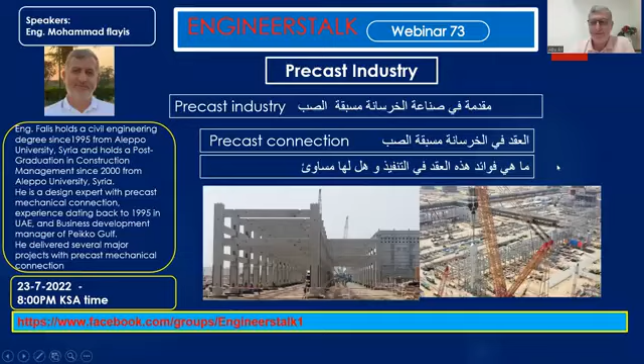I will speak today about precast and the advantages of precast, then some case studies or projects done by precast, and how I will connect the precast elements.

This is the agenda of today's talk. I will start with an introduction on precast, because all of us have heard about precast, but I'm going to show some photos inside the factory, from the site, from the stockyard, from all the process of this precast. Then I will speak about the challenges in the precast industry.

This is some photos from one precast factory. This precast factory is covered by shade. Here we will see this table, which is made for casting a precast element. This table can be tilted and rotated for some purposes, to remove the precast element.

Here we have this precast factory with many tables. We have many methods to cast the precast. One method is on the table, another method is to cast on the bed. We will see some photos for that, but the most famous way is to use this table and prepare the mold on it to make the concrete.

Here, this table has the formwork. This formwork can be normal width or wooden, or it could be steel. It will be as required, but it is more common to use this steel mold.

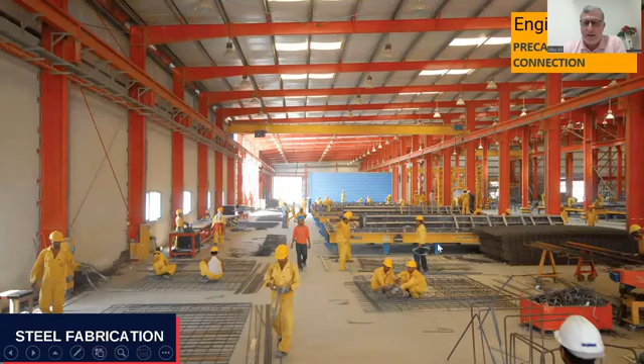Then we will have this area to prepare the reinforcement. As we said, this reinforced concrete material requires reinforcement. As I said, here there is light and there is shade. We can work 24 hours, no obstacle for that.

Here, as I said, we also have this chamber to take care of curing the concrete. After we cast the concrete on the table, we can take the table inside this chamber, and we can implement

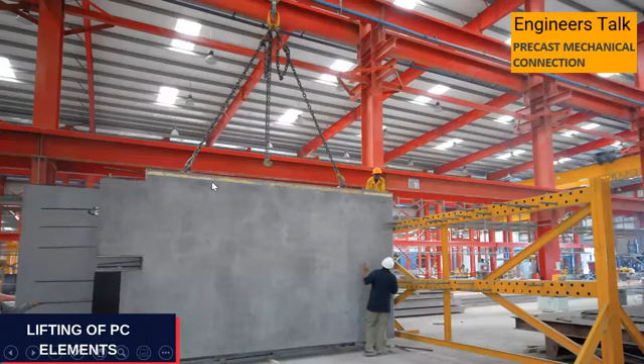the required curing for the concrete to reach the required strength and to accelerate reaching that strength. After we cast and take curing of this precast element, we can handle it to put it in the stock. There is lifting, and we can use the precast element to locate it in the stock yard.

What I speak about is a precast element - we have many types. What we said, that element is a precast element used for wall. We have another type of precast element for hollow core. This hollow core is needed for the roof. It's a normal precast, but there is a core inside the element here to minimize the weight.

And normally this element will be pre-stressed. There is a bed, we will make this strand, we will pull the strand. Then there is a machine to cast the concrete. The type of concrete for this hollow core needs no shutter, because it's named zero slump. No need for any mold - the machine runs, and behind it, it creates the hollow core.

This hollow core is too famous, cheap, and required in the market. It's too much needed on site, and it can go for more span because it's a pre-stress element, and it's light because of this core.

Above this hollow core, on site when we erect it since it's used for the roof, it requires some screed above the hollow core. For this reason, there is some rough surface above the hollow core.

Also, there is another type of precast element for the bridge, this girder. This pre-stressed element requires another type of bed. They will pull the strand and cast it as per the shape. It will be T or I section as per the design.

In conclusion, here I will come back. As we said, the precast is like normal concrete, but a different way to handle it.

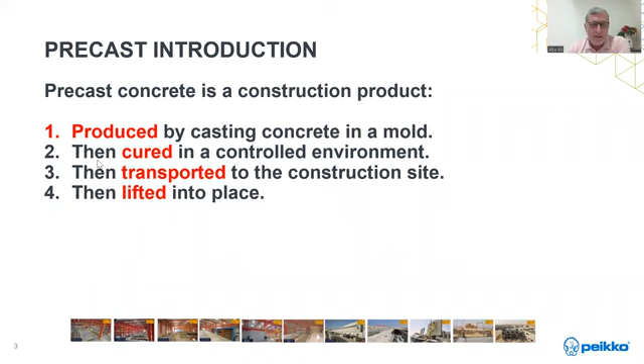I'm repeating because some people entered recently. Here we will have this for precast. Inside the factory, we'll have a table to make the mold and to cast. We will do the mold above the table, and we will prepare the reinforcement inside the factory, which allows us to work 24 hours, 3 shifts or 2 shifts.

Then after we cast the concrete, we can get the table with the concrete to the curing, where we take care of the concrete to reach strength in a fast way. After we make the curing and reach the required strength, we can get this element to the stockyard.

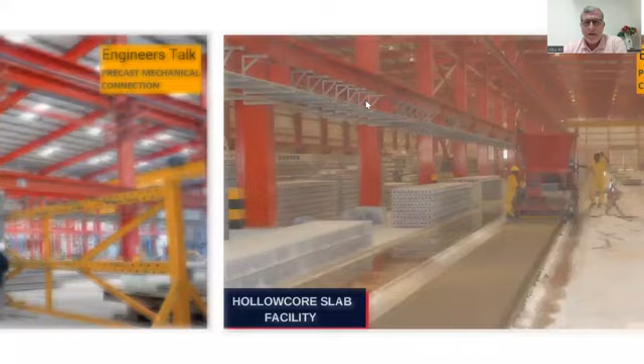As I said, there are different types of precast elements. That's what we spoke about for wall. We have another type of precast element named hollow core. This hollow core has a core to minimize the weight of the element. This uses zero slump concrete, no need for mold, and there is a strand for this.

There is another type of precast element named girders, used in bridges or big spans. Normally like this, what we see here, more than 30 meters - it can be designed as I section or T section or whatever required for the design, as per the mold and design. This is a pre-stressed element, sure.

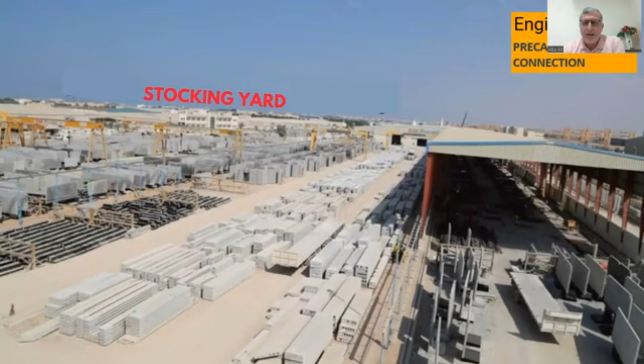The advantage of precast is that we can start the superstructure of the building along with the substructure. On site, they will start excavation and prepare the foundation. At the same time, we can do the superstructure to cast the column, beam, wall, etc. For this reason, we need a big stockyard for precast to put the elements ready for when the foundation is ready to take them.

In precast, we require a strong planning engineer to manage, because if there is a mistake in planning, that means no use for precast, since we use precast to get the building done fast. If there's a mistake in planning, I will finish the foundation and that column is not cast, we cast some other element, then it becomes a problem. For this reason, we require a strong planning engineer and a strong stockyard to cast all the elements. When the site is ready, we can take the required element to the site.

Here, after we cast the element and see it's required in the stockyard, we handle this and take it through a trailer to the site. Here it will be delivered to the site, then it will erect the element. This here we erect the hollow core.

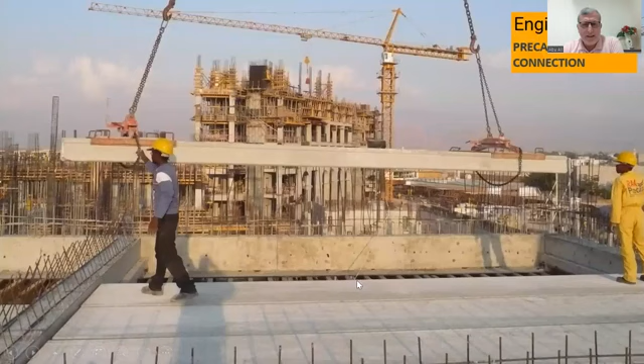Now we see in this building we are using only hollow core as precast. The other elements are cast in situ. It's normal - we always try to get the maximum optimum solution. Sometimes we go for partial cast in situ, other parts precast, other parts steel. It will be the optimum solution.

Also here, another project, but here we are using full precast - the column, wall, even the roof. All this precast, erected in precast.

Let me give you an idea about this project. This project in Dubai was 2,100 villas. The agreement for the precaster was to produce or erect 6 villas per day. Imagine finishing 6 villas per day. This unit here is actually 2 villas, required per day, finishing 6.

Imagine if we go for 36 villas - one day he will finish all walls for these 36 villas, next day he will finish all hollow core. Within 6 days all 36 villas must be finished. If we divide it, that means per day you finish 6 villas. This is the advantage of precast - we can finish the structure very, very soon.

And there's another advantage for precast - you get a high level of quality. No need for plaster, you come for paint directly. Then we can conclude this precast advantage - surely it will expedite the construction.

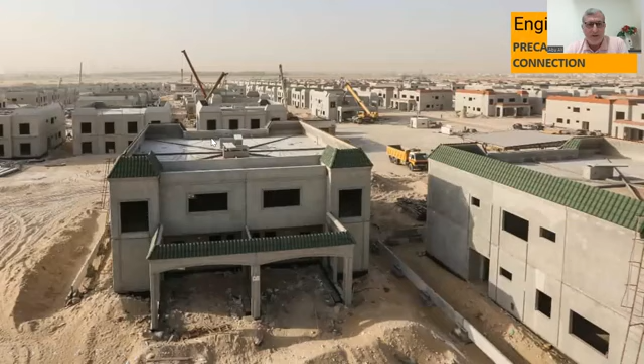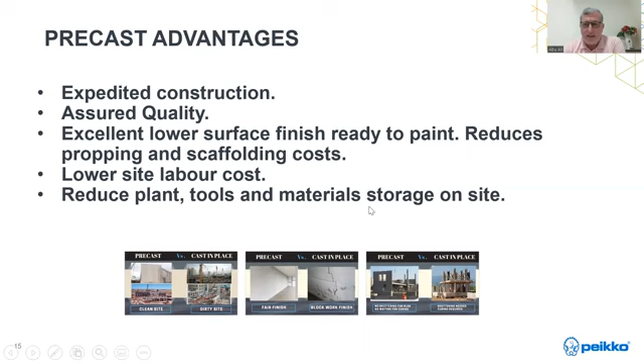So I will have this on the site - I will have less stock material, less operation on the site. Here, if I compare between cast in situ and precast...

As I said, it will be a clean site because there's no formwork, no waste material. It's ready from the factory only to erect - you will see a very clean site. Surely for cast in situ, all the activity will be done on site, so it will have a lot of waste material.

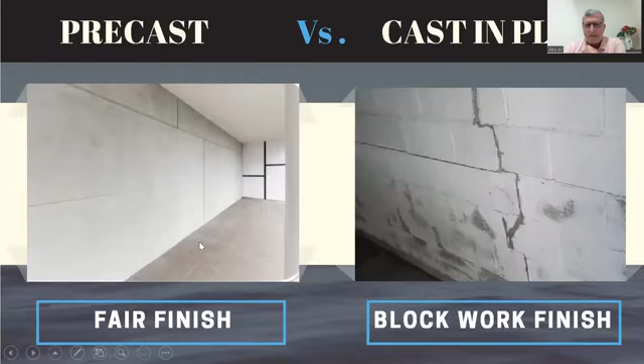Also for precast, because it's reinforced concrete, you will not find any cracks. For cast in situ, unfortunately, because of small element block work and some differential settlement in the foundation, it will create cracks. As we said, there's no formwork for precast, while cast in situ requires many formworks, many shutters, which requires more time.

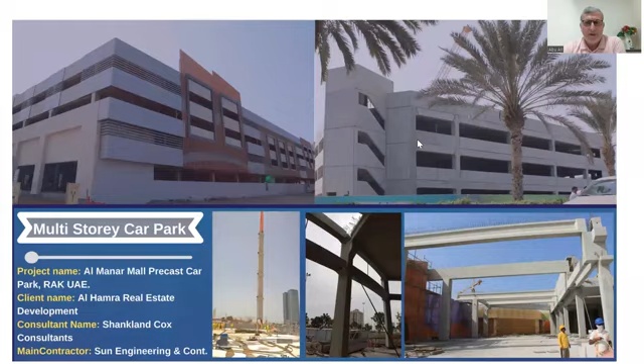Here now I'm going to show some projects done by precast, to give idea about precast, because as mentioned from Engineer Abdul Hakim at the beginning, it's now become a famous industry. All people are thinking about precast. Yes, now I will show some projects done by precast.

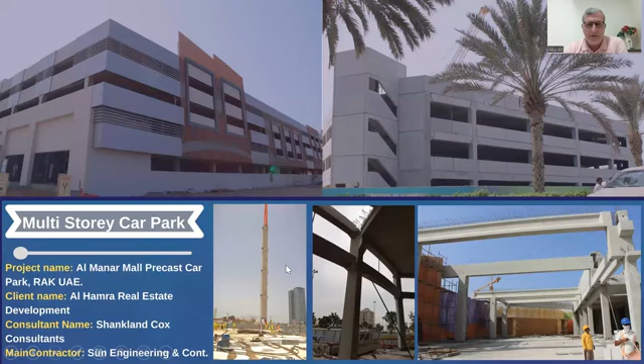Here one car park in Ras Al Khaimah. This car park, sometimes it will be precast to have typical elements. Sometimes the typicality will be inside the building itself. Suppose I have this element, I will see it repeated many times inside the building, then this building will be useful for precast. Not mean I need many buildings to go for precast, no, I need typical elements. Here in a car park, if I look for this column, maybe I'll see this column 100 times. Then it will be nice - I will go for a mold, prepare it, and do it in precast.

Then for the school it will be also the same, because there is typicality, there is classroom repeated, and this element has repetition. So the school will be also useful to be precast. And for the school there is a specific requirement - a school delay lets the client lose, he needs the school to open, and if the contractor delays construction, he will lose one year of investment in the school. For this reason, most of them use precast to accelerate and start investing in the school sooner.

Also here, one industry for oil and gas, where there are pipe racks. These pipe racks in oil and gas will be column and beam, and there is a pipe of oil that runs above this beam. Before, it was not famous to go for precast, but now most of these pipe racks become precast. I will go into more details later in this meeting about these pipe racks. All this column and beam, typical, can be designed one time with one mold, then you can repeat the casting and get the structure very soon.

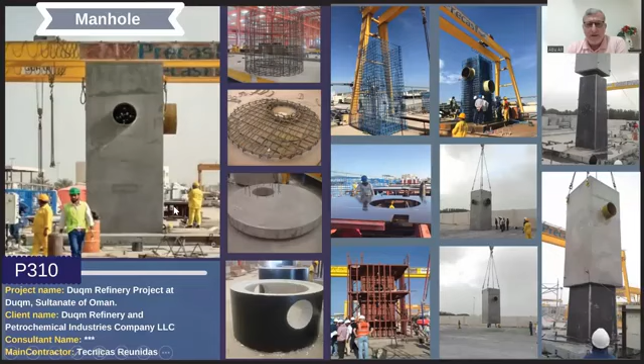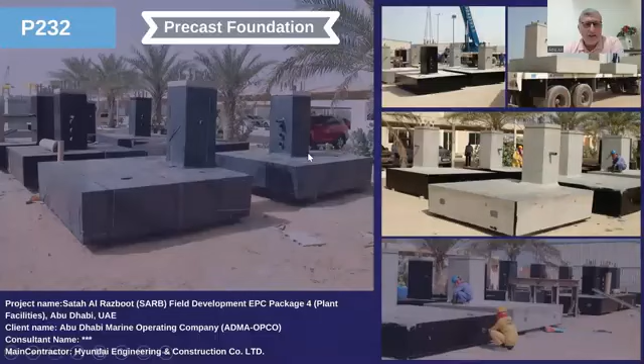Also for foundation - imagine this foundation, normally it's preferred to be cast in situ because it's a heavy element, and to handle this element it will need more money and cost. But sometimes for far areas, like this island in Abu Dhabi for oil and gas, not able to reach for cast in situ and not able to get people to work there. For this reason, they get it in precast - they get it ready in a precast factory and erect it on the final stage. But in normal practice, foundation is preferred always to be cast in situ due to cost, because this heavy element, imagine 3 meters, 4 meters, it will be many tons. To handle this will be so costly, but required.

Another type of project - this accommodation, where we have staff or labor accommodation. There is typicality of many typical elements inside the building, or sometimes the whole building is typical, repeated. We have this staff accommodation repeated 8 times or 5 times or whatever. This would be a very good solution for precast. Where there is more typicality, sometimes precast will reach the same cost as cast in situ, because the mold is prepared one time, then it repeats. For villas, here for villas, I believe now when we have bulk villas, they will think only of precast.

As mentioned, this project requires 6 villas per day to be ready, imagine this magic number, you cannot reach it easily. Also for this infrastructure or road, where we have a bridge above the water, how can I work? If I go for cast in situ, it will be too costly and maybe impossible. For this reason, precast will be the good solution, especially since there is a big span reaching 40 meters, and it's easy to cast.

In this case, sometimes you can move the precast factory near the site. If you have a typical element, you can make the mold, get the crane, and get skilled people near the site to avoid transportation. Because if you have a heavy element or a big number of elements, it's better to cast it near the site and erect it directly to avoid transportation cost. But sometimes if the logistics are far, you need to do it in a factory and transport it to the site, case by case.

It will be studied very carefully because when there is money involved, it will be studied very carefully. Now here's the challenge of precast. Until now we see precast is a very good industry, but there is a challenge because we are going to cast the elements separately - column, beam, wall - and get them to the site.

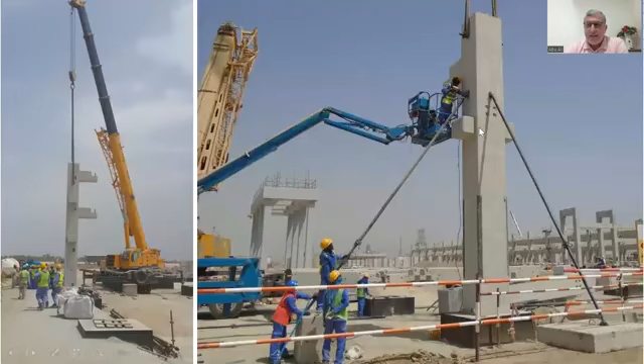Here are some site photos of how I see this column, how I have this propping. They will fix this propping with the precast element, connect it with this counterweight, and here it will be - there is the grouting, and this is the crane.

Here's some site photos, and here there is also one challenge. I need to keep the crane until I fix all this propping. This will cost me more to wait and to grout and to make this propping.

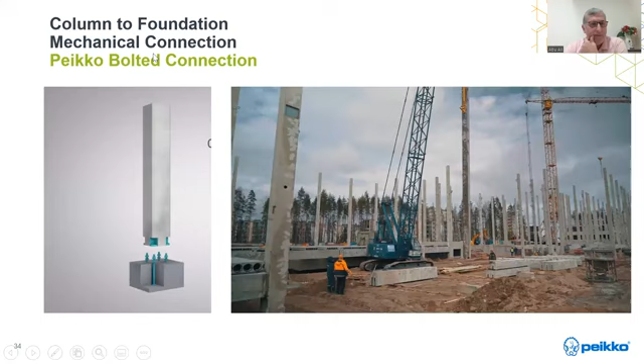Now I will speak about another way, which is mechanical connection. With this mechanical connection, I can connect the precast column with the cast-in-situ foundation easily. No need for the bucket. I will make only dowels from the cast-in-situ foundation, and I will get these dowels here.

I will insert the dowels during casting, and I will place a steel element inside the precast, what we call here the column shoe. This will be produced by Peikko, this bolted connection.

I will insert this in the precast element and provide the dowels. Then it becomes direct to erect. No need for the bucket and no need for temporary support. No need for anything—it will be erected like you are erecting a steel structure.

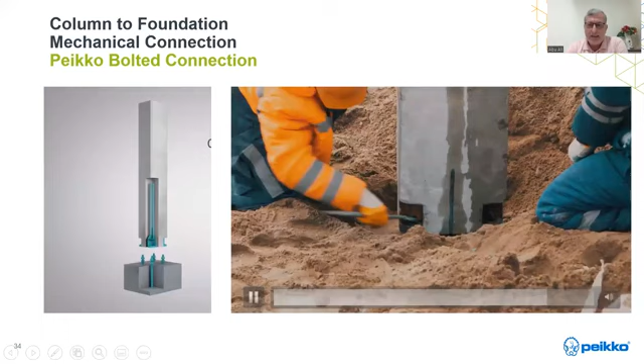You will get this element, put it above the dowels, put on the nut, and done. It's even easy to do the leveling and alignment because it's not final fixed yet.

The advantage of this mechanical connection, as I said, is that it's quick and easy to erect. No need for the headache of the crane staying for propping and grouting. All these things are not required in this connection.

Also no need for temporary support, as I said, and less crane time, because as soon as you tighten the nut, the crane can move to the next column. No need for cast-in-situ work between the bucket and the precast column.

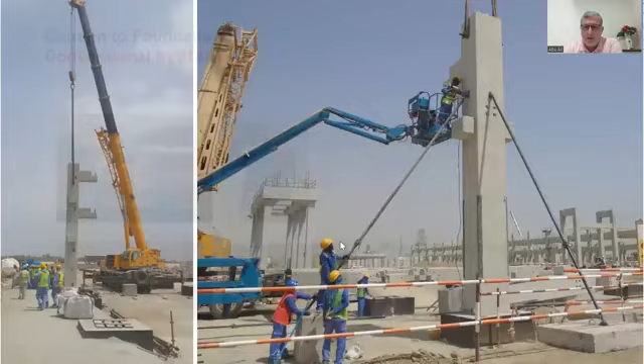This allows for a shallow foundation. As I said, when I go for the bucket method, I need more depth to provide fixation between the column and foundation—I need to go for 1.5 times the diameter of the column. For this reason I need a deeper foundation.

Maybe for this bolted connection, no need, because I only need to catch the anchor bolt. The foundation depth will be as per the soil report and the study, but in all cases, compared with the normal method, here I can use a shallow foundation.

This makes design easier, because we have free tools on the Peikko website. It can give the forces coming from the column, and we can know what shoe is required.

Now it comes to mind: where I will use these dowels, I will have the challenge of erecting the precast column with this dowel. This is sure to be a headache, but we solved it.

We provide a template during the cast-in-situ work to maintain the dowels in the same place, and in the precast yard there is also a template. Then the hole will be aligned with the same place as the anchor bolt. No issue—we have done a lot of projects, alhamdulillah, with no issues. It's simple and just needs care in using the template.

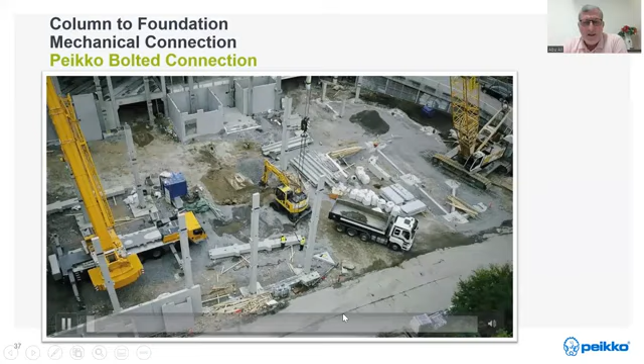So here showing how this column is connected. It's easy to align, and here is the column at the main floor.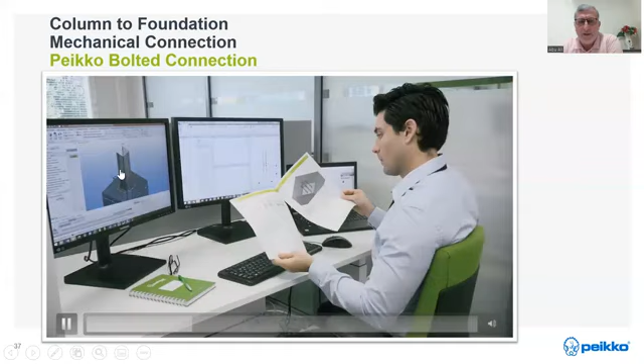Now in the precast yard, how do we make this template? Let me show this—here's the side view of how it works. Now this shows a 3-floor column.

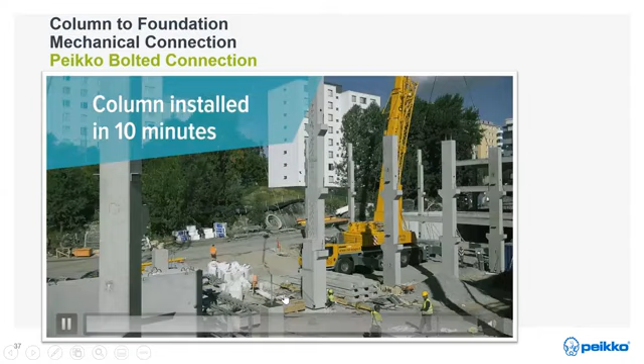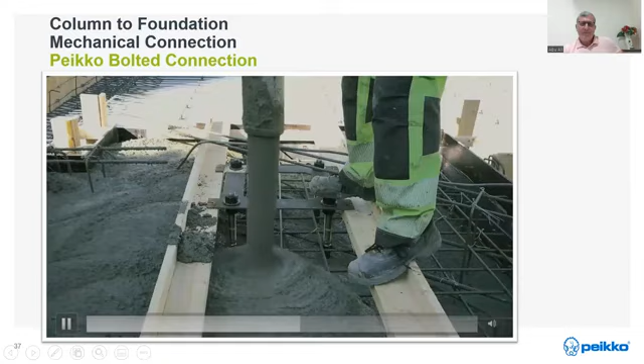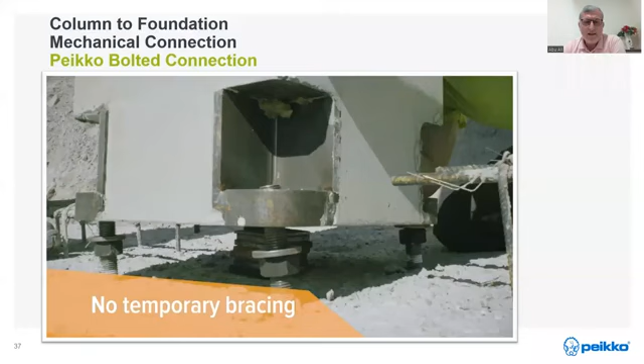We're speaking about connecting the column with the foundation, but the same concept applies for beam-to-column connections or others. As I said, no temporary bracing required, and now with the vertical element, no bracing at all. The site stays free.

Just a crane operator and 2 guys.

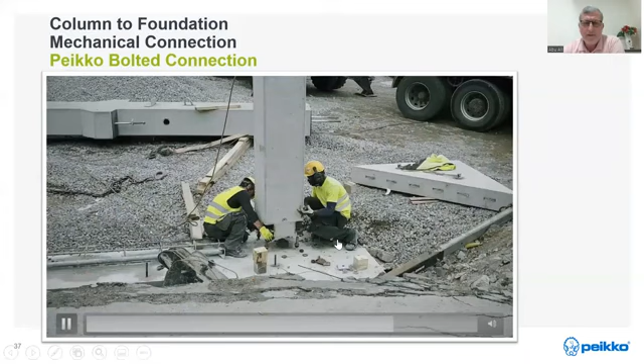All this information can be gotten from the website.

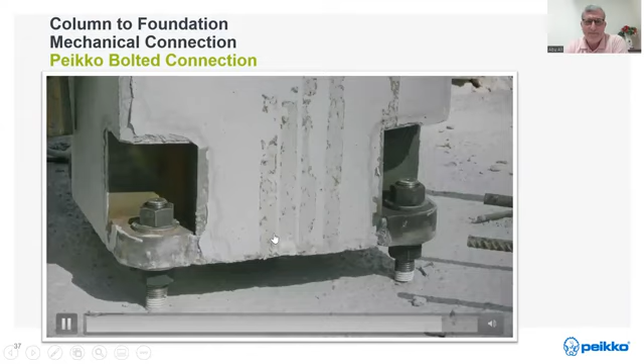Now I will go a little bit technical. As I said, this rigid connection can be column to beam, here column to beam, or column to foundation, like what we see in the photo and video, and even column to column. Sometimes I need columns for many levels, so I can connect column to another column.

Also for the connection, we have two stages to design. First stage is where we erect and make the nut here - still we don't have the grout. We name this the erection stage. In this erection stage, we implement the self-weight of the column and some wind load on the element, and all the force here will go through to the foundation through the anchor bolt. This we name the erection stage.

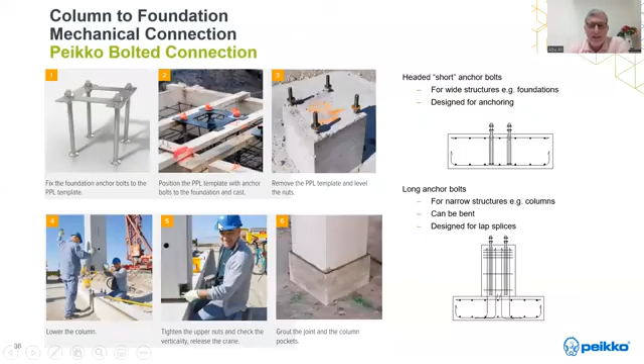Then we have the final stage - sure, this will not remain as it is. Here the precast, after we erect it, we have a grout, then you will not see this hole. After we make the nut, we make a grout, and you will not see this hole. For this reason we name it the final stage - after grouting, after we close this recess, we will have this final stage.

This final stage now will be implemented like a reinforced concrete structure. That means all the load will now be transferred through the concrete and reinforcement, and the load will implement the final load from dead, live, and wind, or whatever lateral load there is. This is the final stage, and this is a concept I'm giving.

In all these cases you need the force - you can apply it in the software. You can get the number of shoes required for this, and there is some required additional reinforcement around this shoe to transfer the load.

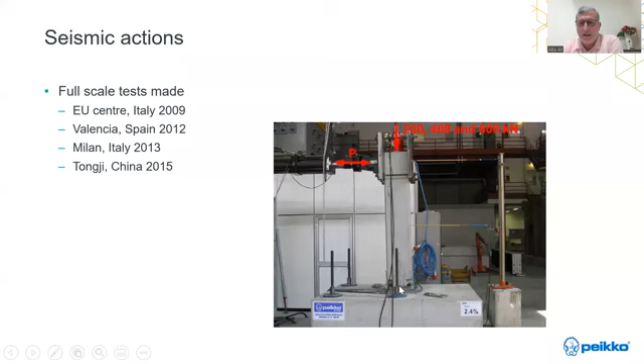This connection, as we said, was tested not only theoretically. We have many tests for this, even under seismic conditions. We did seismic testing in places like Italy, Spain, and China. We have many tests done for this application, and the behavior of this connection has been shown, after study, to be similar to cast-in-situ, not far from it.

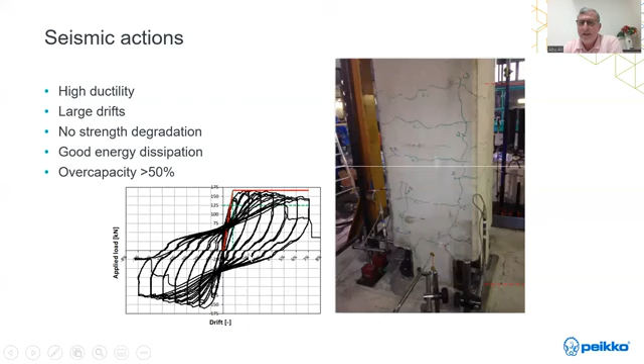Here we will also see the seismic action. If I compare all the connection types between column and foundation, I get all the possible ways to connect. Suppose we make five tests - here we did one test and see the stiffness of this Peikko connection, shown in red. It will be similar to cast-in-situ. We did this test for the Peikko connection. The other is bucket connection, another is bucket with rough surface, and here is the dowel. We made all these tests, and we find the Peikko connection behavior is not far from cast-in-situ.

Now here are real photos from this connection. This is before the casting, and here's the precast element. Here's the template which we provided to the precast yard, and here's the shoe. This recess will be removed later to allow making the nut inside the anchor bolt - this, the green one.

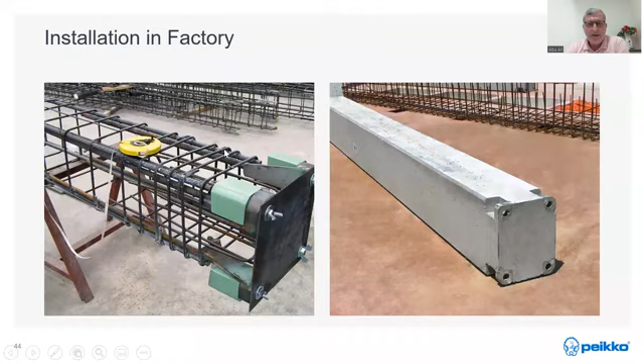Here's the erection - as I said, after we do the erection, make the nut, we will make the grouting to close this recess.

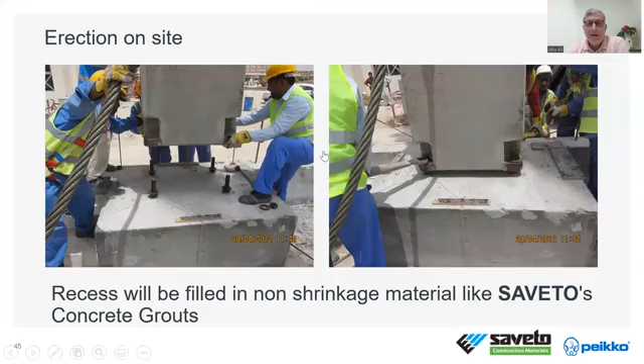Now here's the use of this connection for circular economy. If you want to erect one building and later need to remove it - construct one building for temporary use - like what we faced at Dubai Expo, where some buildings were erected and later they wanted to remove them, this connection is nice to use. We name it circular economy. Here's the connection.

Like this photo, to connect a column with the foundation, we name this the column shoe, and here we have this from cast-in-situ anchor bolt. Also for the wall we have another type, but similar - this is inserted inside the precast. We also name it wall connection, and here we name it column connection.

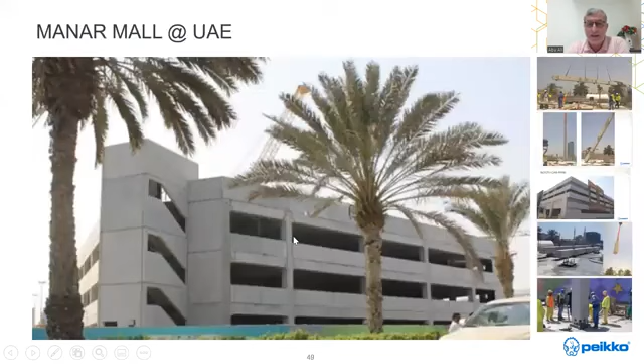Let's look at where this connection can be used. In this precast car park, we have a column for 4 floors. You can bring it ready from the precast yard to the site and connect it to the foundation. This project was originally designed with a bucket connection, but they faced issues and converted to this mechanical connection. This is faster, and the investor always wants this, since he wants to finish the project soon to start investing. They found this mechanical connection better based on a feasibility study.

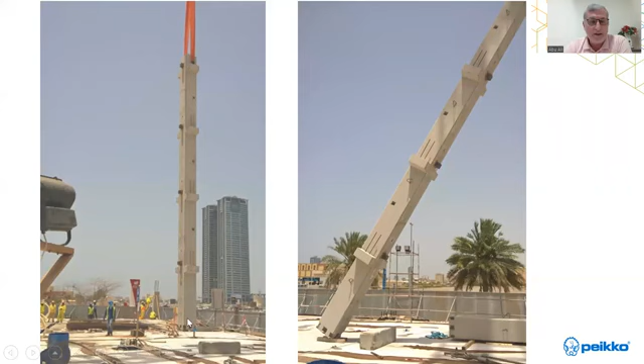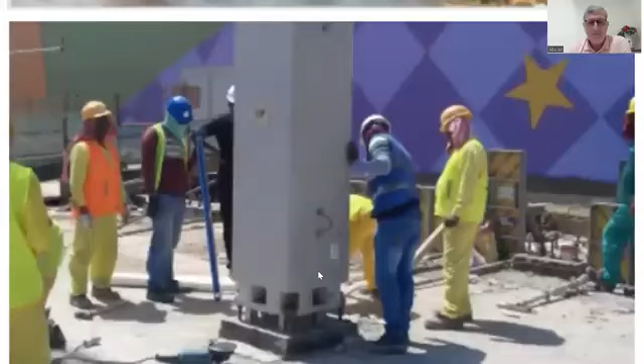Here's another car park that also uses this, here's the foundation and here's the precast. See how it will be erected.

This was also required to connect the substation building elements, and there was a requirement for blast proofing. This connection was designed to achieve that blast proof requirement.

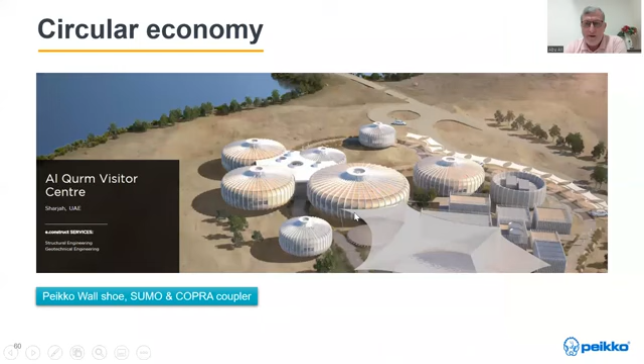Here's a project in Sharjah, UAE, the Al Qurm Visitor Center. It was challenging, and it was done in precast. Without this mechanical connection, I believe it would not be easy to do. We used our wall shoe and COPRA connectors to connect all these elements, even the roof has this type of connection.

Also, in Dubai Expo, there were some precast elements that they wanted temporary, to be removed later. This mechanical connection was a unique solution for that.

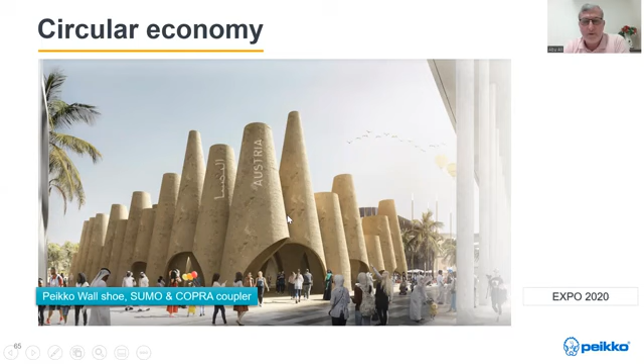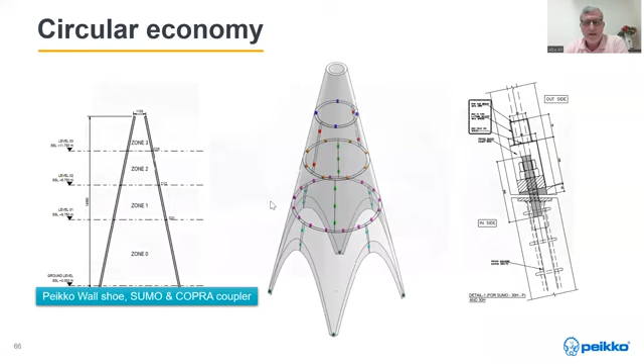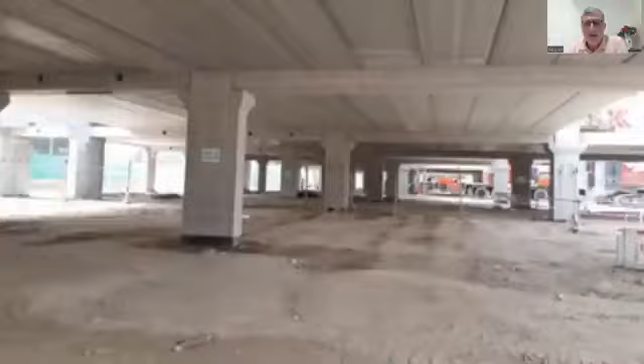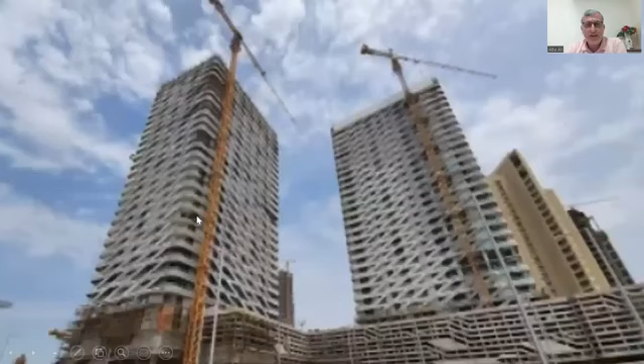All these towers in Abu Dhabi, also a dome - without a mechanical connection, I believe it would not be possible to do in precast. We divide the dome into segments and link them to each other using this mechanical connection, with dowels and nuts to finish. Here's some site photos.

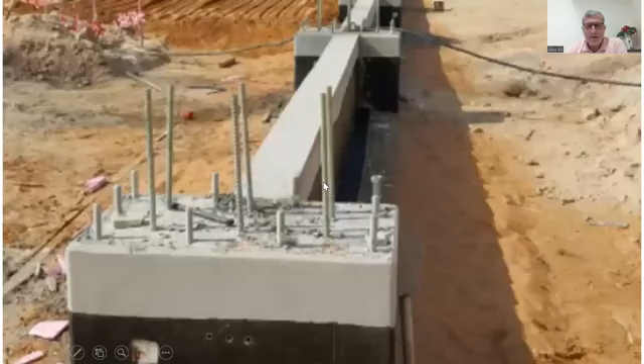Also for factories where we have very heavy loads, sometimes to minimize cost, we use dowels to take the shear and the shoe to take the moment, minimizing the number of shoes needed. We keep the dowels for shear and the shoes to carry the moment. See here, a very heavy column with a cantilever, lifted by a crane.

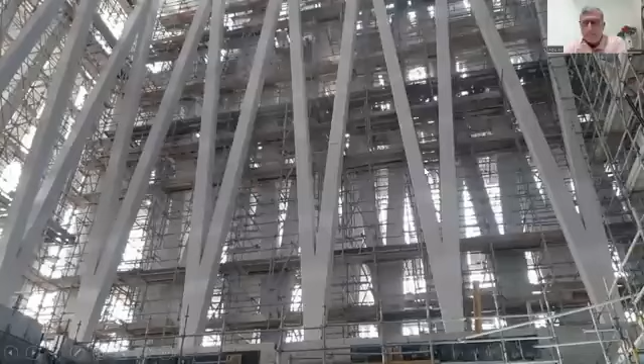Here's another project, a column 26 meters in height. Without mechanical connection, I believe this would not be possible. This column is divided - this is a project currently running in Abu Dhabi - we divide the column and connect each part to the other using this mechanical connection. You won't find it visible afterward because after making the mechanical connection, we apply grout, so nothing will be seen here.

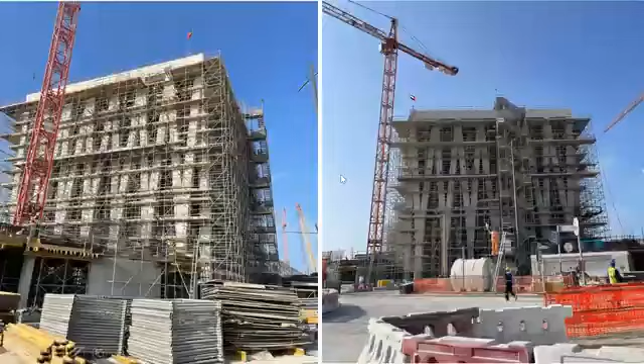Now I'll talk more about pipe racks, because this is a big challenge. As we know, in structures we handle lateral load through shear walls and frame action. In a pipe rack, we only have the frame because there's no wall, so all the lateral load comes to the frame.

We did one project in Oman using this Peikko mechanical connection. It involved heavy forces because there were pipes and dynamic loads - very heavy forces which would cost more. For this reason, we moved the connection a bit farther to minimize the force value, in order to minimize the cost of the connection.

This was in 2017. At that time, the client had three pipe racks and was in a hurry to get the project done. He decided to do one of the three in precast and keep the other two in cast-in-situ. This was the first time in Oman to use precast for this type of structure. When we proposed the precast solution, it was challenging for the client and consultant to approve it - we spent 3 months getting approval for this project.

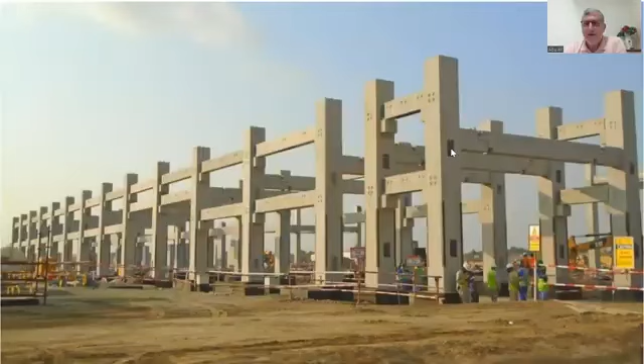No, actually here's the connection between the main beam and the column. We are speaking about this column and beam because it's the same concept. I'm speaking about the connection between the beam and column, the main beam and secondary beam. Here there was a very heavy lateral load because of many pipes.

This project in 2017 was in Sohar, Oman. It was 10 meters precast and another 10 meters was steel structure, total height 20 meters. Here it was challenging to get the steel structure erected, there was doubling at the top. Alhamdulillah it was done perfectly with no issues.

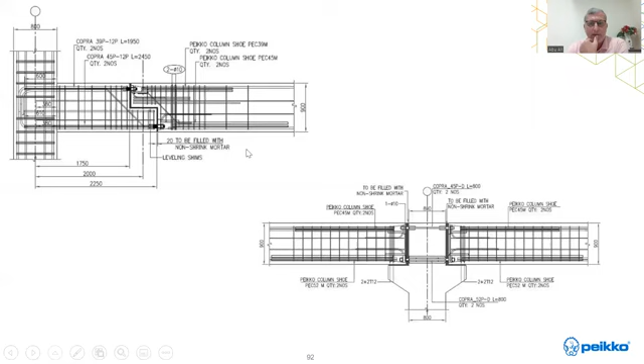Here's some detail on how we made this shoe and dowel. Here's the shoe from one side and dowel from the other side, and here we make the... then this is some site photos.

It's so simple. As I said, after the client Orpic was convinced, all pipe racks in Oman, another one in 2019, became direct precast, and even this one was not divided. Before, in Sohar in 2017, they made it 10 meters precast and another 10 meters steel. In 2019, when they got another pipe rack, they made it 20 meters full precast, no more division. They were convinced for this method and made it full height for this very heavy pipe racks project.

This is what I can explain about this connection. Thank you very much, if you have questions please let me know.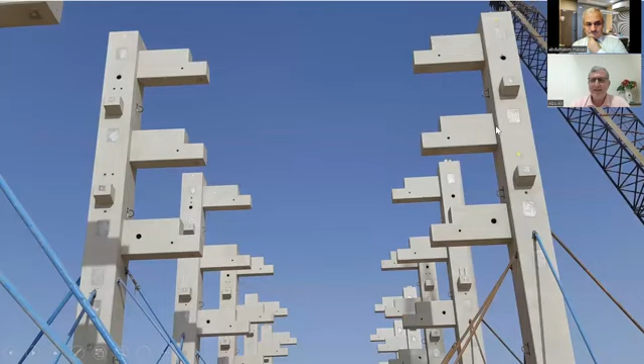Yeah, sure, the issue is force.

When I calculate the moment and the shear or whatever, I can design it to select the required shoe. But if it will be heavy, maybe sometimes it will not fit, maybe I need more shoe. It will be studied case by case. If there is a heavy load and heavy big cantilever, it will be studied, but it's possible.

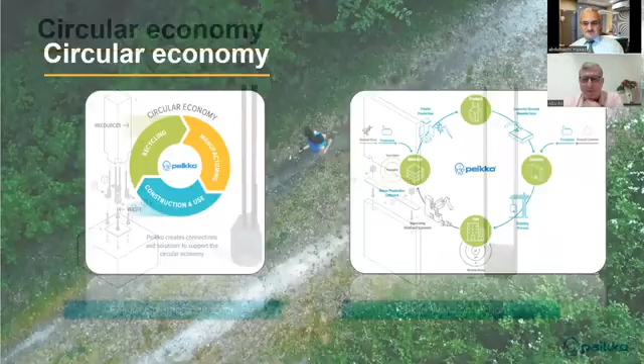Yes, exactly. We have here, I can share this. We have this column shoe, and we also have something called wall shoe. This wall shoe has the same concept. It inserts inside the panel, and it can connect panel to panel. It's simple, same concept.

I will make a dowel from the first panel, like I'm doing here with precast, then from the other panel I will get this shoe, what is named here in Peikko, we call it SUMO. Yes, same concept as the solid panels, but here it will be less and cheaper because it will have less force.

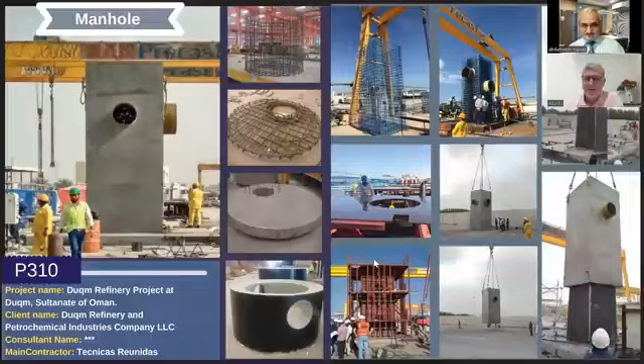Yeah, okay, for this seismic, before starting, because I came late for this lecture, some seismic activity happened here in Ras Al Khaimah. For this reason I became late, yes.

This seismic, if I go for this photo where there is force - to design this shoe, I need the forces. I will make an analysis for this lateral load, whatever it comes from, wind or dynamic load or seismic or whatever. Then I will utilize it. Normally I get this force ready from the EPC contractor. This is what I'm saying, the EPC contractor will put all this load and give me the force near where I need to make the connection.

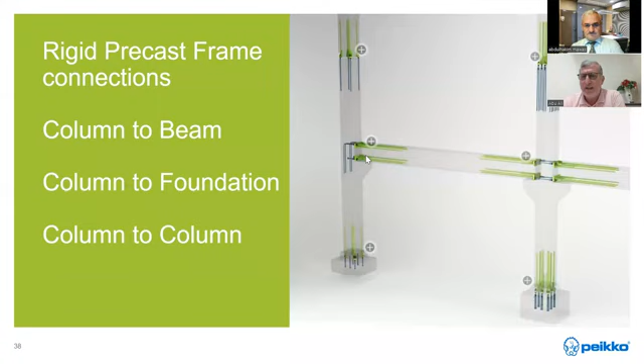Simply, I have this software, I will put this moment and all directions, then I will get how much I need. Now, when I get this rigid, then I have frame action, then no need for any bracing. When I have this frame, it's rigid, then it can provide stability for the lateral load.

But there is another question, because when doing this frame action, we do it in one direction. I'll come to the bay here, the main beam. This main beam is rigid, and we have this frame, and the lateral load can be absorbed by frame action. But for the other direction, they keep it as a pin connection, but every 2 or 3 bays they make it rigid. Sometimes they don't make it rigid, they use bracing instead. There are two choices here: if they want to use steel, they can avoid making it rigid, and by this way it makes the space frame or 3D frame to absorb the lateral load.

Thank you for the explanation, thank you very much. Thank you Ustaz, shukran doctor. Shukran jazilan, shukran jazilan.

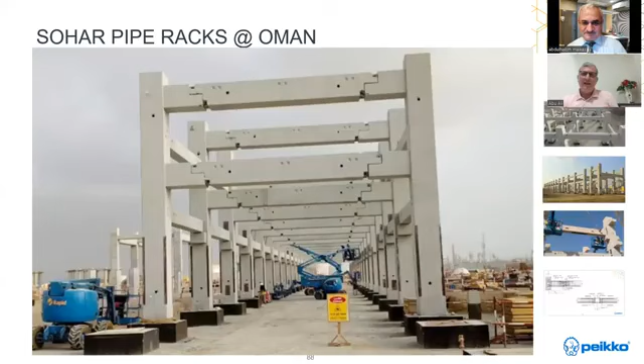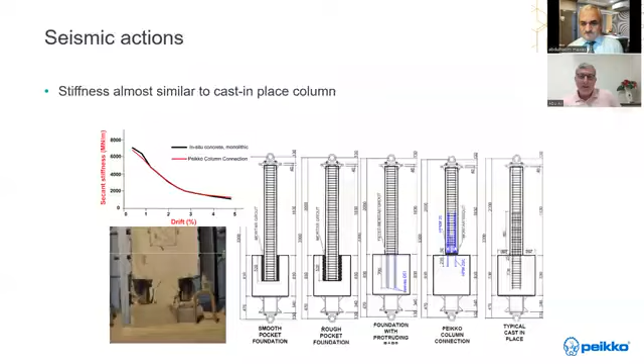Mr. John asks: what is the price difference in general if choosing mechanical connection phase dowels or other traditional connection elements? Yeah, we actually did this exercise. What I prepared in this presentation was based on a feasibility study for one big project in Qatar this year. We compared if they go for the pocket and normal connection, or if they go for this mechanical connection of Peikko.

We make all this study. I can share it with you, Mr. Abdul Hakim, and you can share it with others, but I don't have it in figures. If you calculate all this crane, grouting, all these things, because we specify it in element, we get this price, and we compare it with Peikko. Then we find Peikko is cheaper and faster, complete here and complete there, and we find it's better.

I can share this to distribute it to this colleague, inshallah. I will share with you, Mr. Hakim. Yes, so we will share it with the friends.

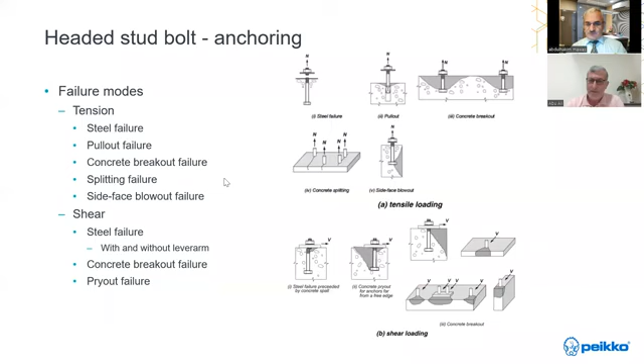The question is about a precast cladding system, with non-bearing panels supported laterally on a steel structure. Is there a special requirement to consider in the design for both serviceability and strength? I understand this question.

Simple. In a cladding normally it will be less force. See here, you will not see this connection as it's so small. We have this wall component, what we name it SUMO. It's simple to put inside the precast, and it will be nut and bolt and finish. It's so simple, it will be the same concept. We get the force, we implement, we see the size of this SUMO, and we do it.

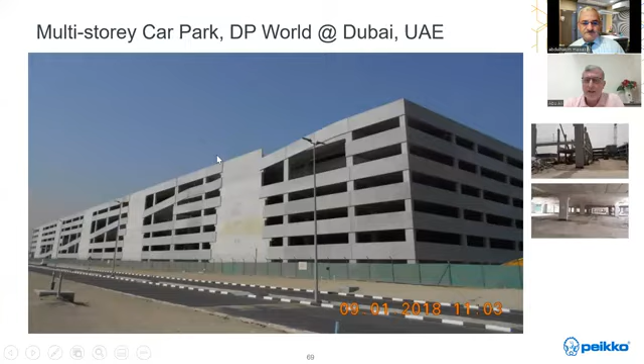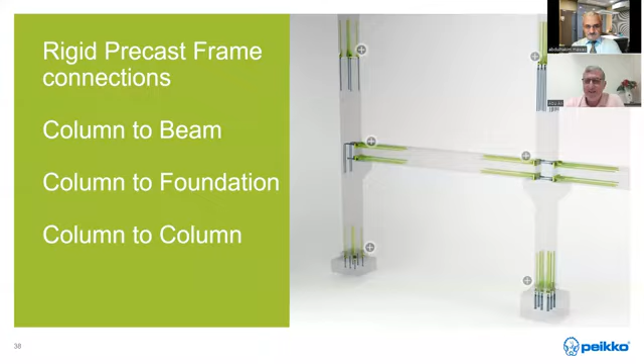Actually, before getting a specialist to make this mechanical connection, it's the unique solution to make this pocket. How will you connect? You need to connect the precast element with the foundation. What will you do? I believe this is the available way to do it. But if you have this mechanical connection, then...

For this reason, this is like a socket shoe.

What is the difference in design? Here in design it will make this requirement of the code. As I said, you make it deep 1.5 meter from the diameter of this column. Then you will consider it as fixed. You need to apply the requirement of the code with the grouting, with the depth, with everything. Then it will be considered as rigid, and you need to pay for this.

You need to design this wall, because as I said, this small wall will work as a cantilever. You need more reinforcement to carry this. You will assume some rotation or some load for designing it. This is the design. As a structure, we will consider the connection here hinged or fixed.

No, it will be fixed, because you will go 1.5 meter deep. Sometimes you are going 1.5 meter deep, it's heavy, like a person is inside this pocket.

Actually, why I asked this question, because I think since 10, 11 years back, there is one designer, a precast company, who considers this connection as hinged. It just came to my mind, so I prepared this question.